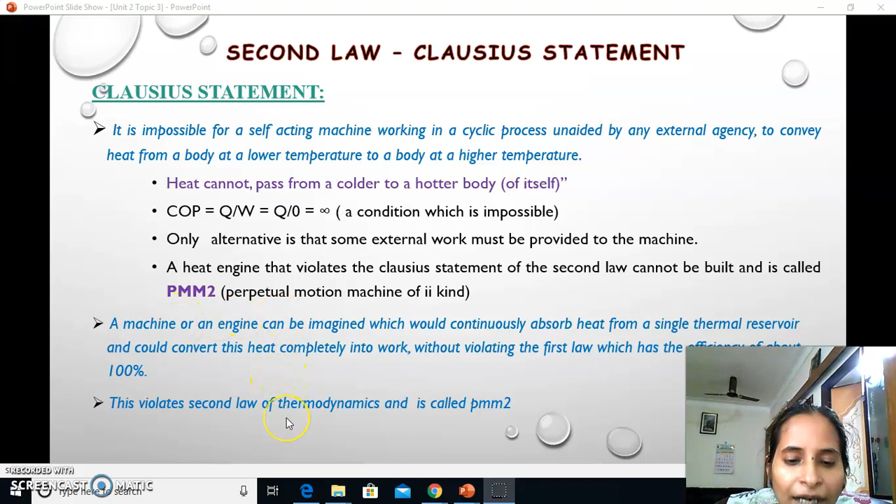So the only alternative is that some external work must be provided to the machine, and a perpetual motion machine of the second kind is a machine which violates the Clausius statement of second law by transferring heat from a lower temperature to a higher temperature. Okay, and this is the violation statement, which I will explain later.

The second statement is the Kelvin Planck statement, also called the heat engine statement, which states it is impossible to devise a cyclically operating heat engine, the effect of which is to absorb energy in the form of heat from a single thermal reservoir and deliver an equal amount of work.

Okay, so we have already discussed that there is no circumstance in which Q2, the heat loss, can be avoided. Okay, so the same statement is only spelled out here: if there is entry of heat supply, exit of heat is also there. It should be there. If there is heat supply, heat rejection should be there. If there is entry, exit should be there. That we cannot avoid under any circumstance.

And thus, if an engine does that, it is called a perpetual motion machine of the second kind, which violates the Kelvin Planck statement. This indicates that it is impossible to build a heat engine with 100% thermal efficiency, that is, where all the heat supplied to the system is converted into work. Okay, so 100% efficiency of any body, any object, anything is not at all possible. And thus the second law also tells the same, that there is no engine without heat rejection.

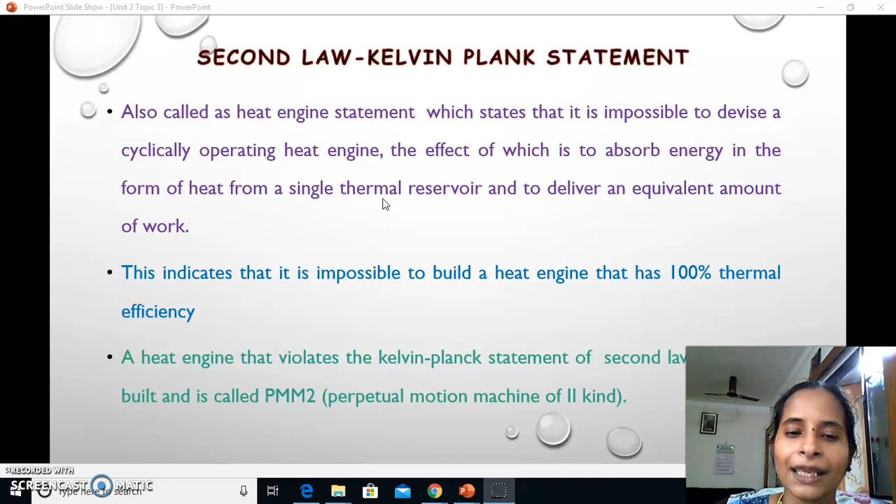The Clausius violator is shown here. Violator means one which does not follow the Clausius statement, and here it is shown as a heat pump. Its work is to maintain a higher temperature compared to the atmospheric condition, and thus it needs to take heat from the atmosphere, store it in a place, and keep this place at a higher temperature than the surroundings. Okay, for taking heat from the lower temperature atmosphere, it has to use external work input as an aid.

Okay, but here there is no work input, yet this heat pump is continuously maintaining a higher temperature, and that higher temperature is utilized by a heat engine, which converts it into work, exactly equal to work.

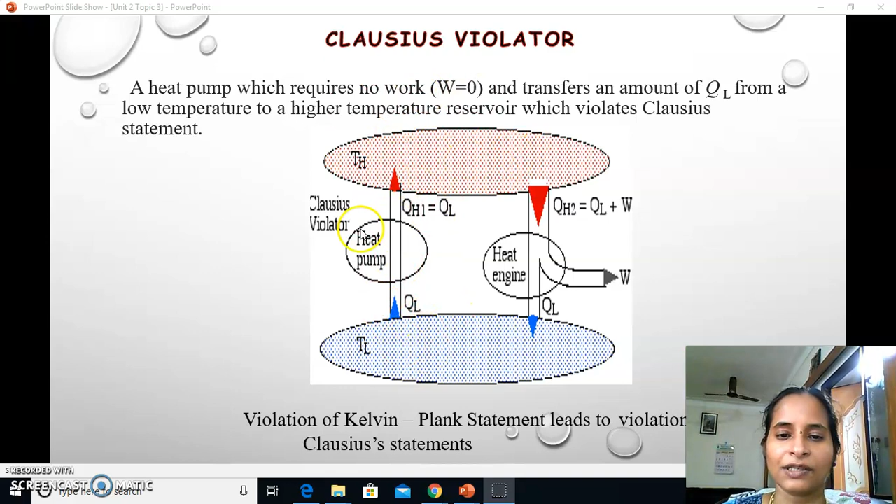Okay, so the same heat loss only coming here is not at all possible. Violation of Kelvin-Planck statement leads to violation of Clausius statement also. A heat pump which requires no work, transferring an amount of QL from a lower temperature to the higher temperature, violates the Clausius statement.

And this is also showing you the next statement violator, called the Kelvin-Planck violator. Here you can see very well that the same amount of heat is directly and completely converted into work. That itself is wrong here. Q in is there, here QH1, so heat loss should be there. Here the W could not be equal to Q. And the same way, once it violates, automatically another statement also will be violated. So W is equal to Q, no heat rejection, which violates the Kelvin-Planck statement.

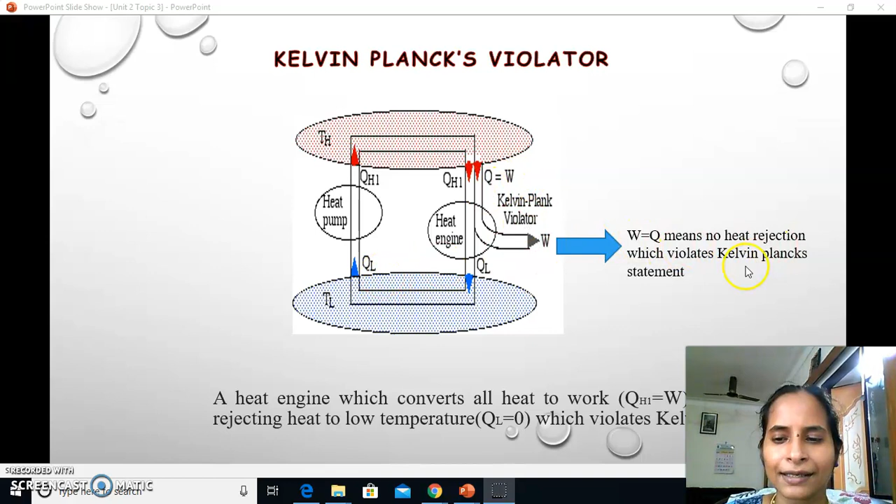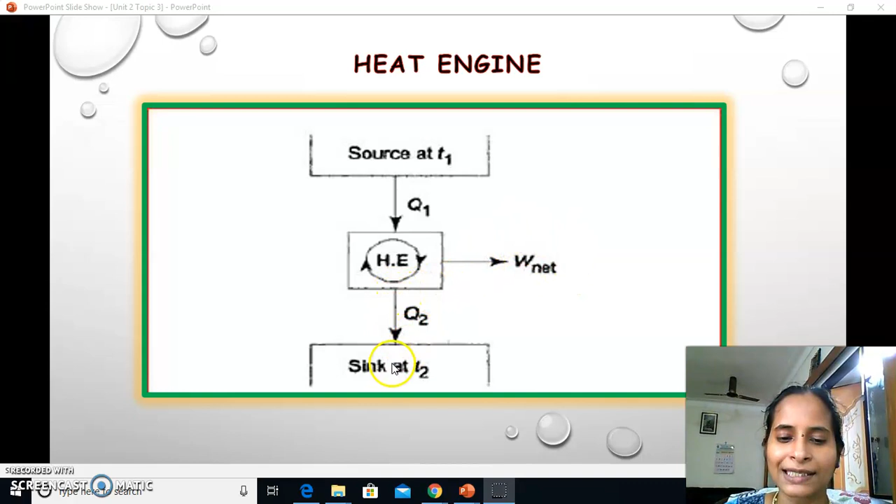Here is a simple diagram which shows the working of heat engine. Already I would have shown this: a source at the higher temperature T1 gives heat of amount Q1 to the engine, and the engine is generating the work output W net, and the remaining heat is rejected to the sink at lower temperature T2.

Here you can see the PV and TS diagrams for the working of heat engine. First 1 to 2 is compression, then heat addition, expansion, heat rejection. Both heat addition and heat rejection take place at constant pressure, and compression and expansion are isentropic or adiabatic processes. That has been transformed into the TS coordinate, which shows 1 to 2 and 3 to 4 as isentropic processes, and constant pressure heat addition and heat rejection processes shown in the curve in TS diagrams.

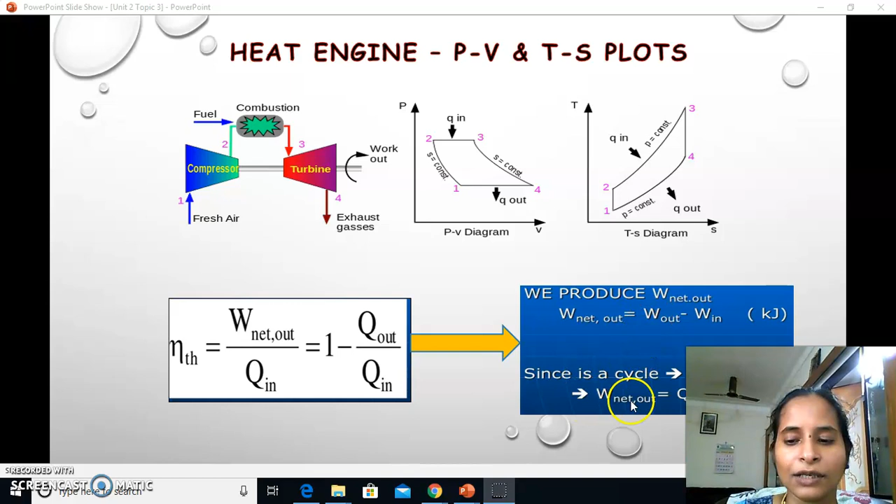And already we have derived this thermal efficiency equation: net work output to heat supplied. So finally the W net, or work output, is equal to W out minus W in, and if it is a cycle, then W net out is equal to Q in minus Q out. For a cyclic process, the cyclic integral of del Q is equal to del W. You can equate these two answers.

This is perpetual motion machine of second kind, which shows heat from the source applied to the heat engine, and exactly equal amount of work is generated by this heat engine. This is PMM2, and there is no heat rejection. It is violating the Kelvin-Planck statement.

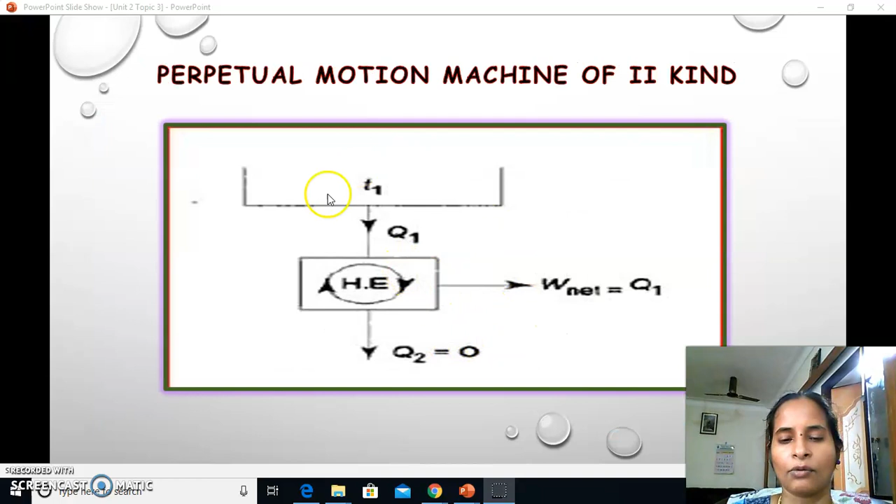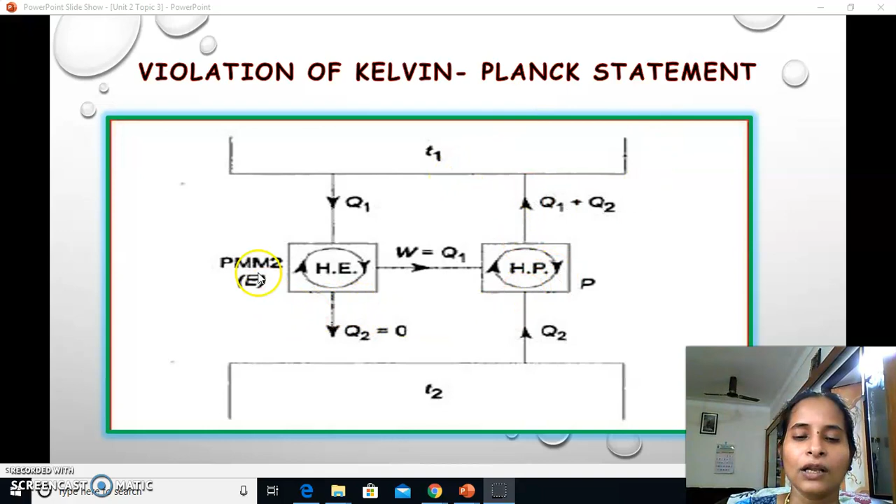This is also, you can see, without any aid of external energy, the work produced equal to the same amount of heat is given to a heat pump. In that, lower heat energy is converted into higher heat energy by the heat pump. So it is violating the Kelvin-Planck statement, and the Clausius statement is violated here.

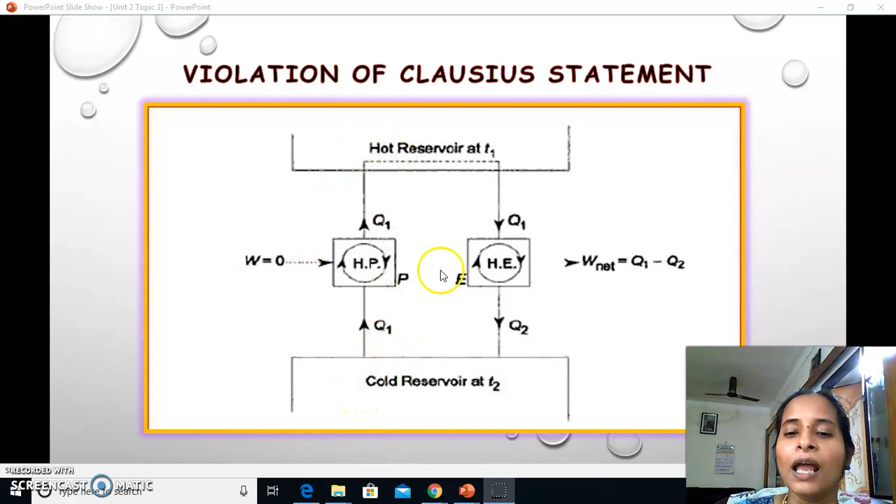You can see that without any aid of work energy, this heat pump is making the hot reservoir reach higher temperature by utilizing the cold reservoir. So the heat is transferred from cold region to hot region without any external aid, and thus it is violating the Clausius statement. You just ignore this portion, just concentrate on one side.